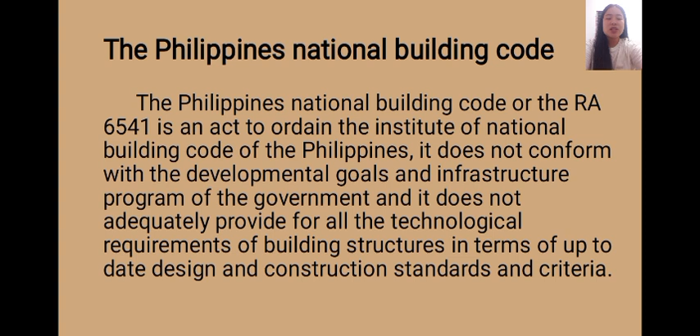So it aims to ensure that developers conform to the implementation of modern technical knowledge on construction, building design, occupancy, maintenance, and use. So next is the general provisions. The general provisions, building requirements, and site requirements are as follows. First is the general building requirements.

1. All buildings or structures as well as accessory facilities thereto shall conform in all respects to the principles of safe construction and must be suited to the purpose for which they are designed. 2. Buildings or structures intended to be used for the manufacture and/or production of any kind of article or product shall observe adequate environmental safeguards. The third one is that buildings or structures and all parts thereof, as well as the facilities found therein, shall be maintained in safe, sanitary, and good working condition.

So the main purpose of building codes is to provide and maintain standards to protect the public health, safety, and general welfare as they relate to the construction and occupancy of buildings and structures. Model building codes provide protection from tragedy caused by fire, structural collapse, and general deterioration.

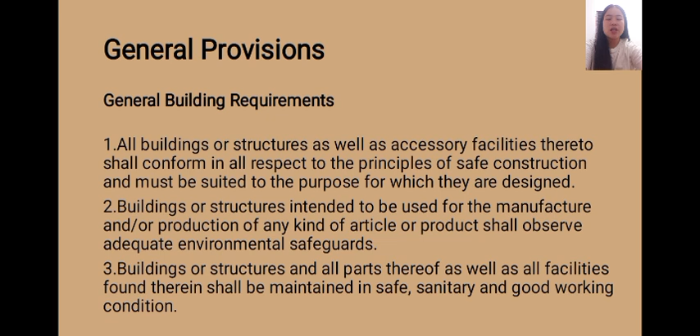The second one is site requirements. First, the land or site upon which will be constructed any building or structure or any ancillary or auxiliary facility thereto shall be sanitary, hygienic, and safe. The second one is sites of buildings intended for human habitation or abode. The same shall be at a safe distance, as determined by competent authorities, from streams or bodies of water and/or sources of air considered to be polluted, from a volcano or volcanic site, and/or any other building considered to be a potential source of fire or explosion.

So, planning a site typically begins by assessing a potential site for development through a thorough site analysis. Information about slopes, soils, hydrology, vegetation, parcel ownership, orientation, etc. are assessed and documented. So, going through a thorough analysis of the feasibility of developing a site allows the architect to determine the optimal location and design for a structure that works within the space.

While conducting the site analysis, the architect also needs to review the zoning of the potential project site. These are the regulations that have been developed by the local municipality to separate the land into different use areas, such as residential and industrial zones. This allows the town or city to not be overpowered by one type of land distinction.

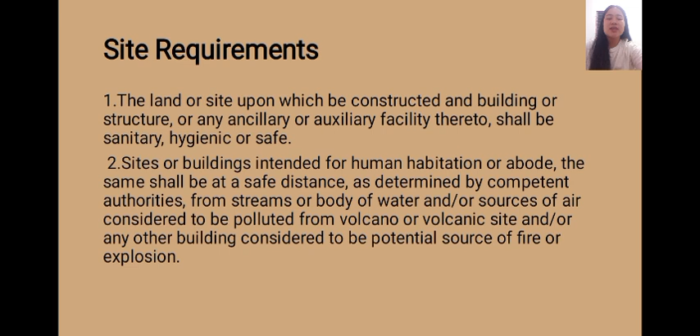So the next is types of construction. There are five types of construction. This will help the learners understand what type of construction of building they see in public. It will also help them identify materials to be used in making such infrastructures.

Type 1 shall be made of pure wood construction. Type 2 shall be wood construction with protective fire-resistant material and one-hour fire-resistive throughout, except that permanent non-bearing partitions may use fire-retardant treated wood.

Type 3 shall be of masonry and wood construction. Structural elements may be any of the materials permitted. Exterior walls shall be of incombustible fire resistive construction.

The type 4 construction shall be steel, iron, concrete, or masonry construction, and walls, ceiling, and permanent partitions shall be of incombustible fire resistive construction. The last type of construction is type 5, which shall be fire resistive throughout, and the structural elements shall be of steel, iron, concrete, masonry construction.

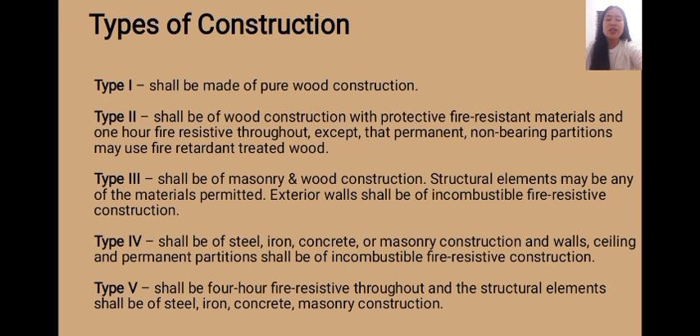So there are different materials used to construct a building. They have fire resistive ratings. That is the degree to which a material can withstand fire as determined by generally recognized and accepted testing methods.

It is also important to understand the fire resistive time period rating. This is to prevent another loss to business, since it measures the length of time a material can withstand being burned, which may be 1 hour, 2 hours, or 4 hours, etc.

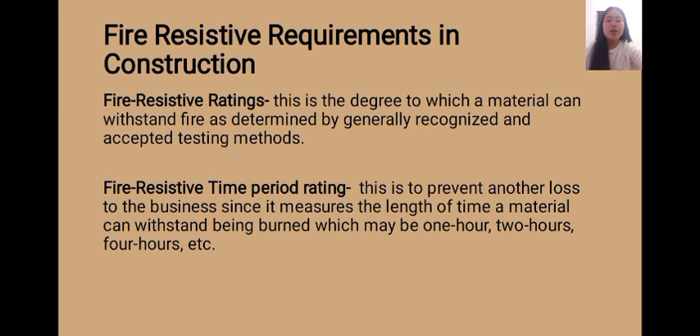Next is the fire resistive standards. All materials of construction and assemblies or combinations thereof shall conform to the fire resistive ratings. First is the floor construction, solid RC slab, solid pre-stressed or concrete slab. The third one is the partitions. Fourth, protection for metal structural members. Five, exterior wall. And six is column.

The fire resistive standards are important to improve the safety of occupants, firefighters, and neighbors during fire events, and minimize damage, so buildings can return to use quickly, boosting community resilience.

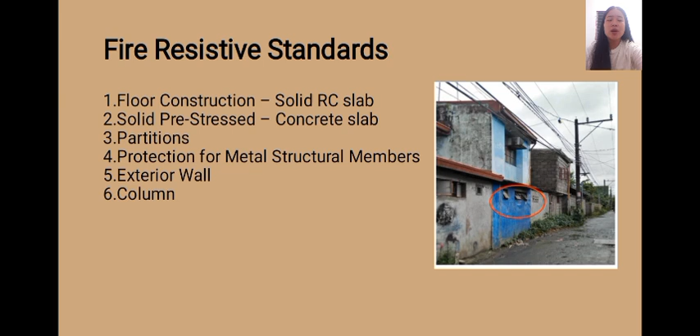All existing openings on all firewalls shall be sealed completely to maintain the fire integrity of adjoining buildings or structures. There are exemptions, depending on the usage of the building, especially if it is used for ventilation. Below are samples of substandard buildings that have not followed minimum requirements on firewalls.

This is the maximum building height. The maximum height and number of stories of proposed building shall be dependent upon the character of use or occupancy and the type of construction, considering the following factors. The first is end user population density, light and ventilation, width of RROW streets, particularly of its roadway carriageway component, building bulk, the last is off-street cum off-site parking requirements.

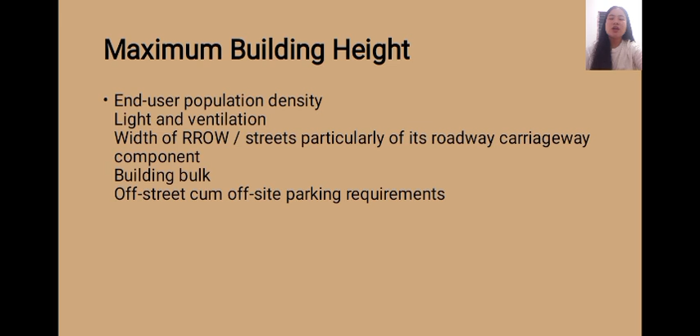So the maximum height and number of stories of proposed building in relation to local land use plan and zoning regulations, environmental considerations, and geological, hydrological, meteorological, and topographical. Next is prevailing traffic conditions. The last one is availability and capacity of public utility service system.

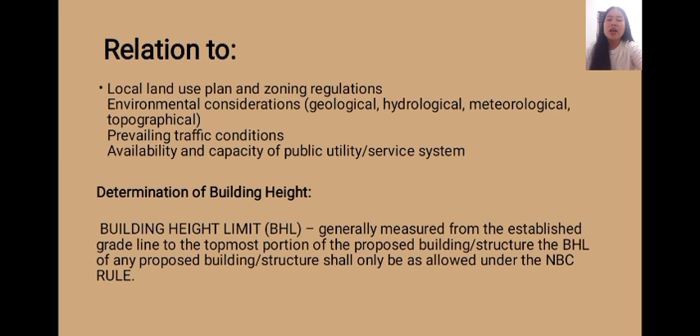The next is determination of building heights. The building height limit or BHL is generally measured from established grade line to the topmost portion of the proposed building and/or structures. The BHL of any proposed building or structure shall only be as allowed under the NBC rule.

The last is for sloping grade, perpendicular to RROW with a difference in elevations of less than 3 meters. The highest adjoining natural grade ground surface or finish grade or sidewalk surface shall be the established grade elevation.

The building height shall be measured as the vertical distance from the average final grade to the highest point of the coping of a flat roof or the deck line of a mansard roof or to the average height of the highest gable of a pitch or hip roof.